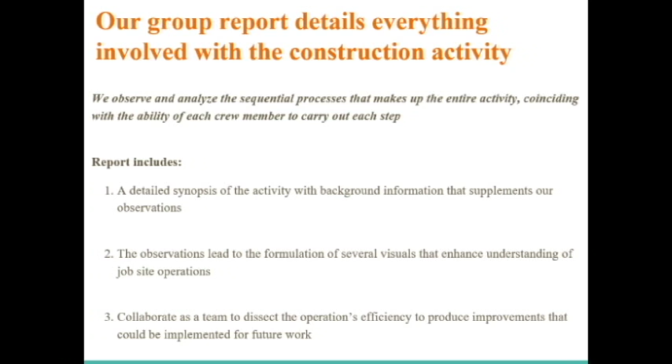This video is made for the term project of CEE 420 Construction Productivity from Team Bechtel. We observe a site from the video. This video was uploaded to YouTube on May 16, 2011, and it shows the brick laying process for 6 minutes. From the video, we can see it is a sunny and clear day, and the temperature is moderate, judging by the clothes of the workers.

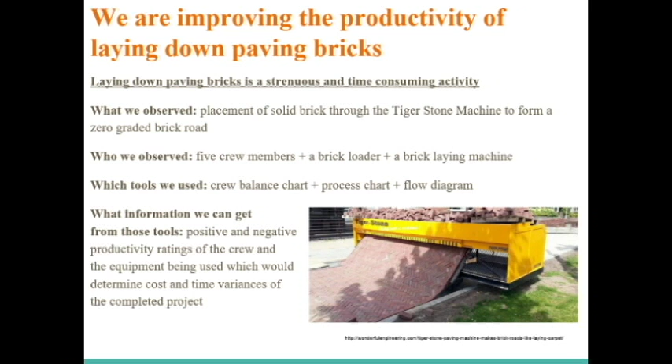Let's see the executive summary of our project first. Basically, we are improving the productivity of laying down paving bricks, and we observe the placement of solid bricks through the Tiger Stone machine to form a zero-graded brick road. There are 5 crew members, 1 brick loader, and 1 bricklaying machine on site. We are going to use the crew balance chart, process chart, and flow diagram to analyze the existing and proposed plans.

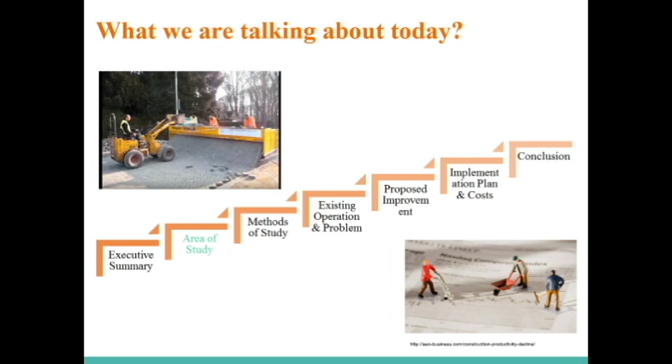Hello, this is Matt Brannick, and I'll be talking about the area of study. Basically, we saw that there are 5 workers in the video. 1 worker was cutting bricks, basically along the edges. There are 3 workers arranging bricks into the Tiger Stone paving machine, and 1 worker was simply operating a small loader, transporting the bricks from storage to the Tiger machine.

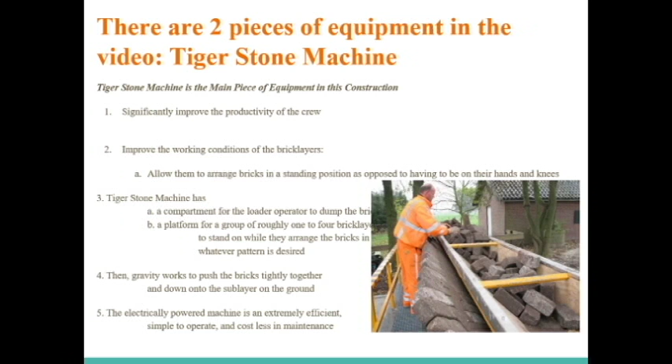Then there are basically 2 pieces of equipment in the video. As you saw, there was a Tiger Stone machine that ran off electricity. It helped them place the brick and increase their productivity, and definitely made it easier for the bricklayers to put down the bricks without having to bend over, get on their knees, and all that tough work. The other machine was the front end loader, which was designed to transport the bricks from the storage area to the Tiger Stone machine.

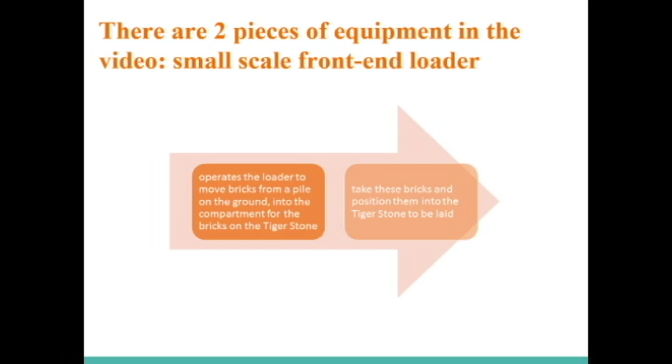And finally, the hardest, most labor-intensive portion is the guy who was falling behind with the cutter. He had to fill in the edges, and he was down on his hands and knees, had padding on his knees, and was required to use the most amount of skill in putting down and filling in the areas that were missed.

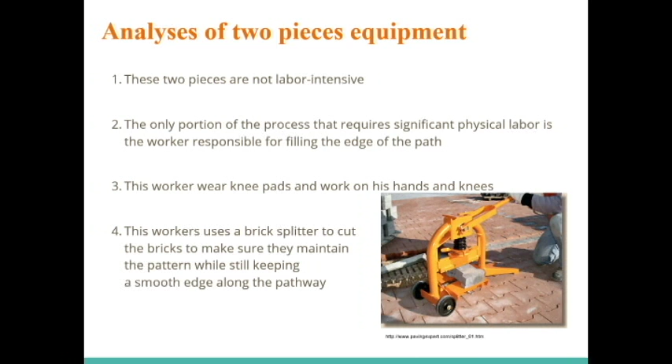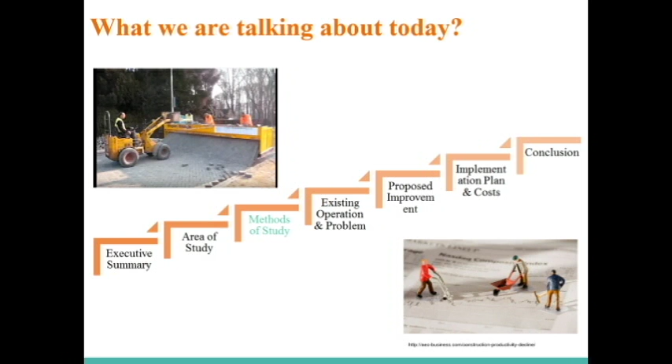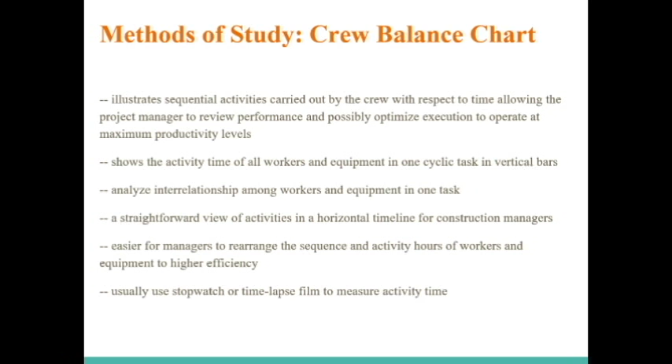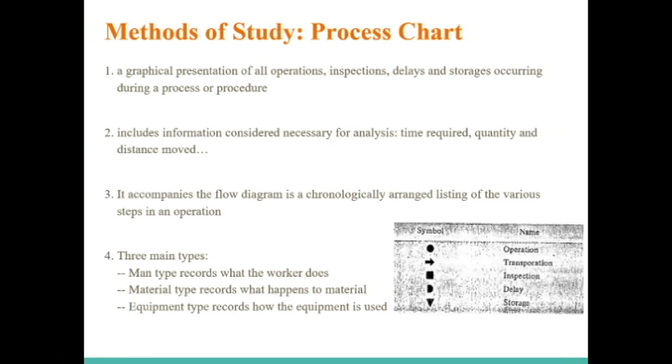The process chart is a graphical presentation of all operations, inspections, delays, and storage occurring during a process or procedure. Process chart has 3 main types. Man type records what the worker does. Material type records what happens to material. Equipment type records how the equipment is used.

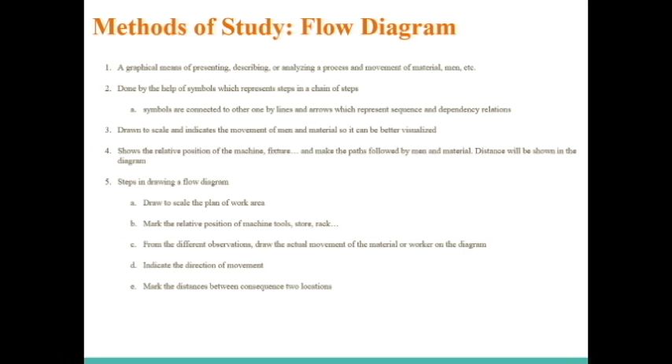Flow diagram is a graphical means of presenting, describing, or analyzing a process and movement of material or man. Flow diagram shows the relative position of the machine, fixture, and makes the path followed by man and material.

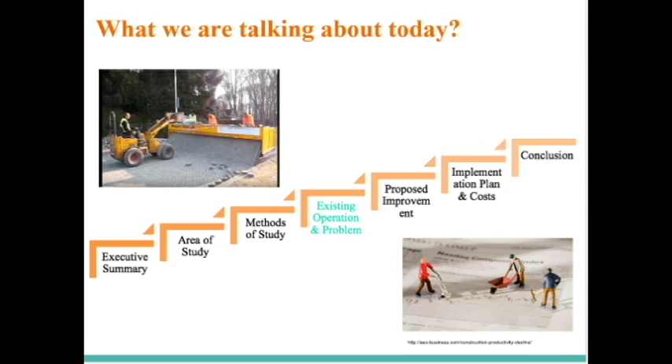We will now discuss the existing operation and the problems that go with it. As you can see, there are 5 workers performing this activity: a skid steer operator, a stone cutter, 2 bricklayers, and a Tiger Stone machine operator.

Overall, the productivity of this activity goes up when using the Tiger Stone machine compared to laying the bricks by hand. However, the stone cutter is the reason that productivity is not at its highest potential. The stone cutter can only cut and place 7 bricks per cycle on average, while the Tiger Stone machine creates 12 areas that need bricks to be manually cut. This is a huge problem that drops the productivity of this operation.

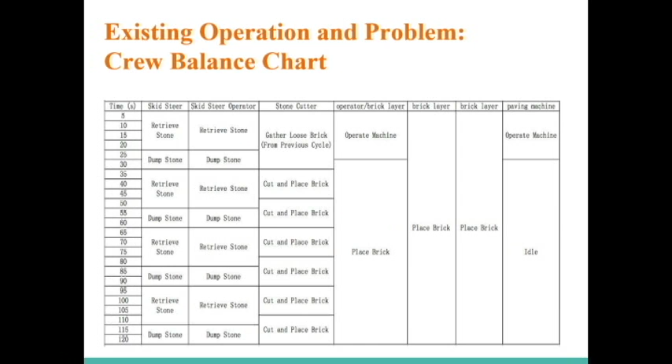Another problem is that the skid steer cannot evenly drop bricks throughout the whole machine, which causes workers to stand really close to each other to grab bricks. This unnecessary problem causes congestion on the machine and slows productivity.

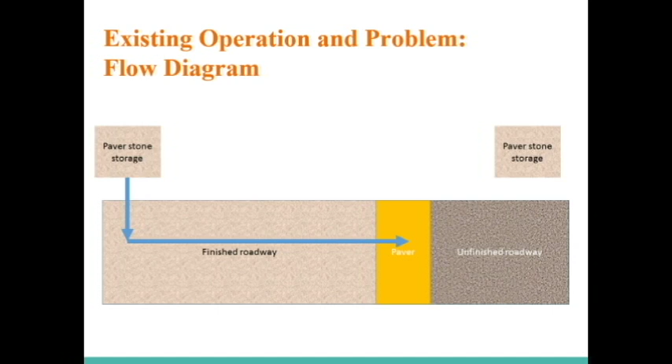The process chart and flow diagram shown are used to visualize the activity. When deciding which plan to implement, we used cost analysis to determine which plan would be most cost effective for improving the given activity. Using RS Means data, we estimated the direct cost of each activity, including labor, material, and equipment costs.

Some other assumptions that we included in this cost analysis are as follows. We assumed that the Tiger Stone bricklayer can lay a maximum of 3,229 square feet per day. This is directly from the website, which shows the Tiger Stone bricklayer.

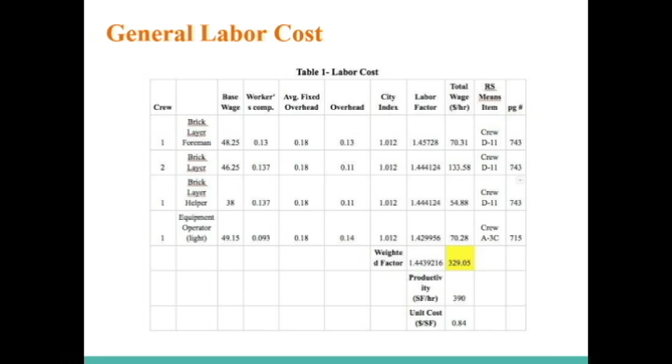All labor unit costs and factors were obtained from RS Means 2016. The skid steer loader is assumed to be a 78 horsepower diesel type machine. The operation and ownership cost of the Tiger Stone bricklayer was assumed to be about $25 per hour. The material cost of the bricks were assumed to be $3.96 per square foot.

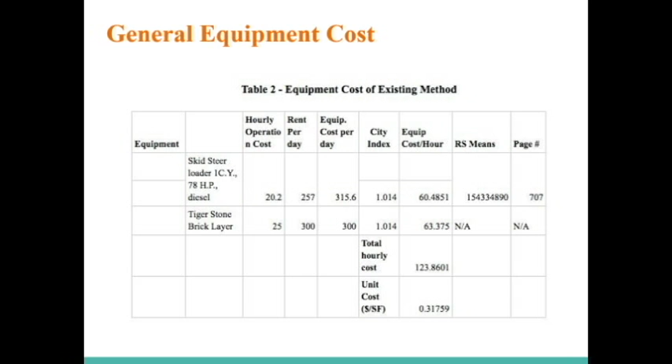When we analyzed the implementation plan of using pre-cut bricks, we assumed that there would be a 5% increase to material costs if we requested this from the manufacturer. While not all the improvements had a significant change in the unit cost per square foot of work done, they did in effect shuffle the costs from different categories, which can have benefits in and of itself.

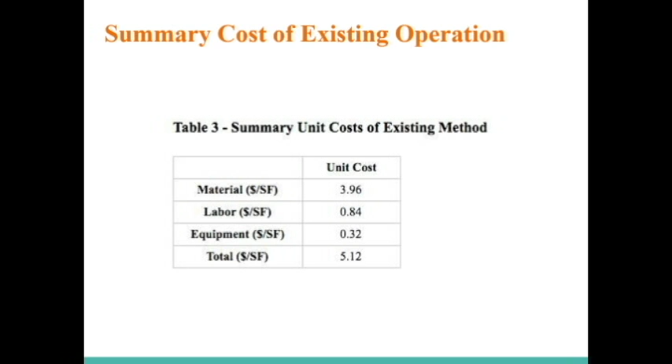After observing the video of our construction activity and identifying some of the issues with the process, we began to come up with a few solutions to remedy these issues. As mentioned before in the existing operations and problems section, one of the issues we observed was that the stone cutter was struggling to keep pace with the machine. As a result, our first proposed improvement is to add an additional stone cutter to the crew.

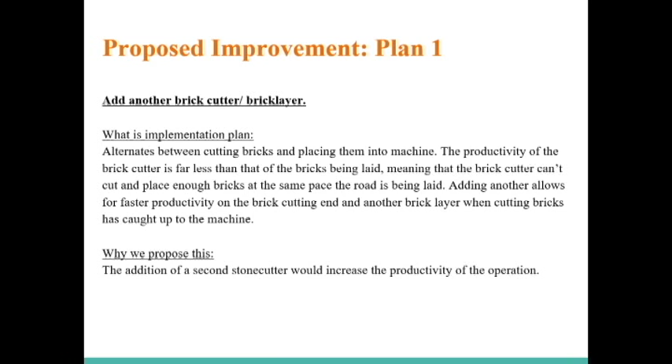In order to complete the pattern, each triangular area needs 3 bricks cut and placed on each side. Each cycle needs 6 bricks on each side of the pathway, for a total of 12 bricks that need to be cut and placed per cycle. However, we observed in the video that a single stone cutter can cut and place 7 bricks per cycle, which is 5 bricks below the pace needed to keep up with the Tiger Stone.

The addition of the second stone cutter brings the productivity of cutting and placing bricks more into accordance with that of the Tiger Stone. Additionally, in the event the stone cutters catch up and are waiting on the Tiger Stone, the extra stone cutter can join the bricklayers on the Tiger Stone in helping to arrange the bricks.

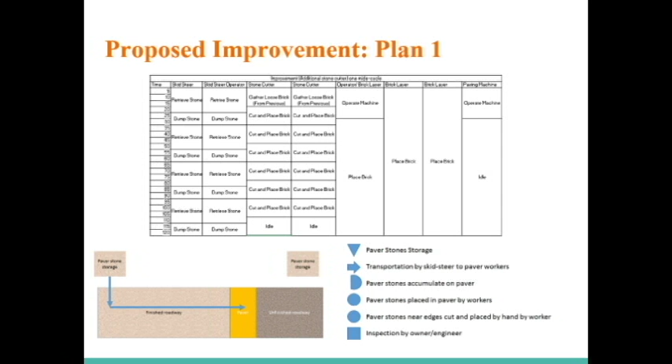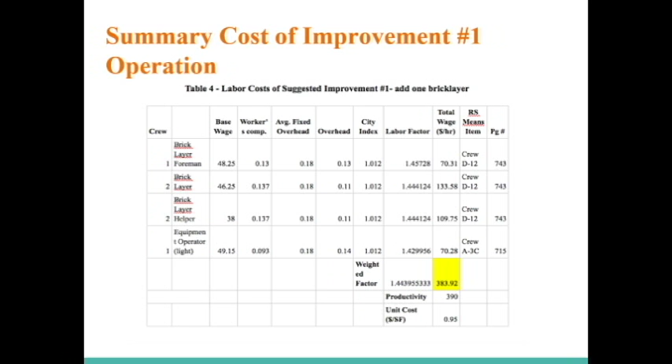Adding this extra stone cutter will increase the productivity of the crew, allowing each stone cutter to remain on one side of the roadway. This reduces the time the original stone cutter may have spent walking from one side of the pathway to the other. Additionally, this also increases the safety of the operation, with there being no need for the stone cutters to walk back and forth across the pathway and into the loader's path.

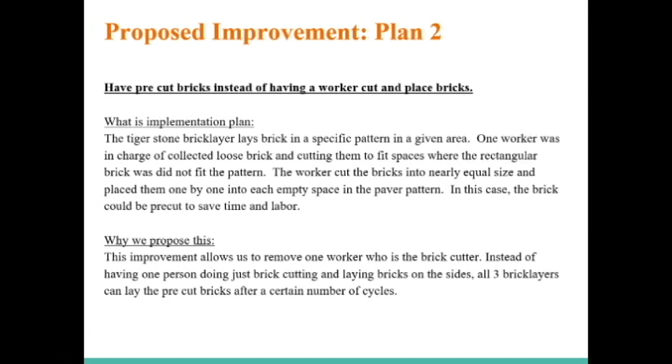Improvement number 1 details the addition of a stone cutter to the crew. This would be the second stone cutter in the crew. This addition would increase the productivity of the operation. Both stone cutters start off by gathering loose brick from the previous cycle, decreasing the amount of dropped bricks abandoned per cycle. 2 stone cutters would be strategically placed on each side of the Tiger Stone paving machine.

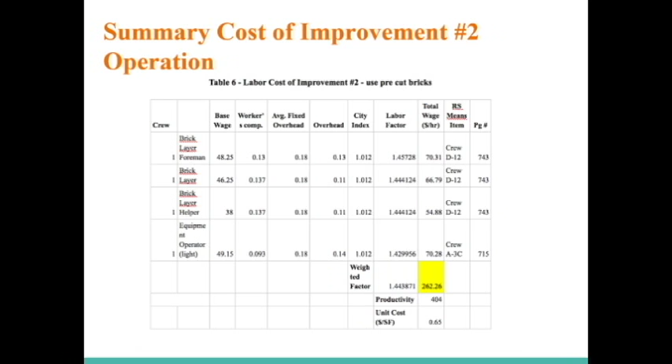In the original setup with 1 stone cutter, it was noticeable that their productivity was lagging behind the pace of the Tiger Stone machine. Adding a second stone cutter would assist in closing the productivity gap between cutting and placing brick and the machine churning out finished road.

Proposed improvement plan number 3. We added a flatbed truck instead of the skid loader.

The bricks will be neatly sorted on an operated flatbed truck that will follow the Tiger bricklaying machine at a level height for the 3 brick layers to pick up and place into the Tiger machine when needed. The flatbed truck would then push the brick piles horizontally towards the brick layers so they do not need to move from their stationary positions.

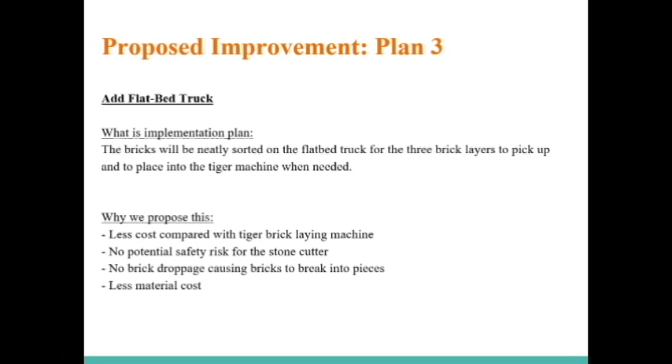The purpose of this is we have less cost compared to the skid loader, no potential safety risk for the stone cutter, no brick droppage causing bricks to break into pieces, and an overall lower material cost.

The crew balance chart shows the following, with the replacement of the skid loader and the skid loader operator. The flatbed truck will be supplying the bricks to the 3 brick layers at a constant rate through the 2-minute cycle. The flatbed truck operator will move the truck forward at each point the Tiger laying machine operates.

A stone cutter will be needed for the cut and brick placement for the side pieces of the road. The stone cutter will not be performing the task of gathering the stone from the previous cycle, because with the flatbed truck there will be no droppage of bricks.

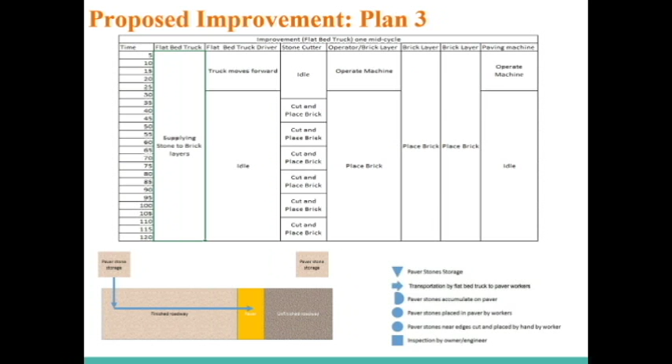The summary cost of adding a flatbed truck and removing the skid loader is shown on the chart below. We have 2 pieces of equipment: number 1 is a flatbed truck, and number 2 is a Tiger stone bricklaying machine.

We use the RS Means resource to find the hourly operation cost, rent per day, equipment cost per day, city index, and equipment cost per hour for the flatbed truck. We had to Google the equipment costs for the Tiger bricklaying machine, because RS Means did not have it listed. With all these calculations, we calculated the total hourly cost to be $124.37, and the unit cost per square foot to be 32 cents.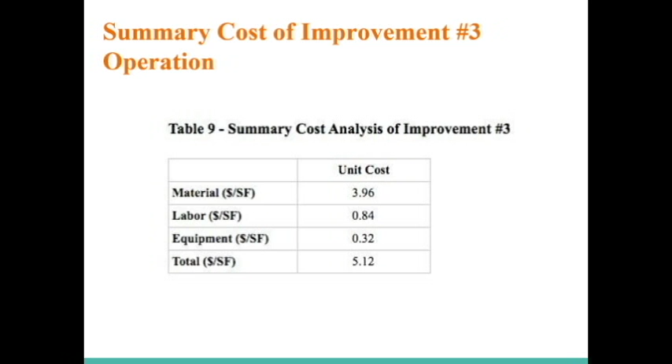The implementation of Improvement 2, ordering pre-cut bricks, will maximize efficiency while decreasing cost. Prefabrication in off-site facilities is a technique increasing in popularity, as they have known benefits including decreasing overall project costs, decreasing schedule times, improving overall construction quality, and allowing for more efficient use of both materials and labor.

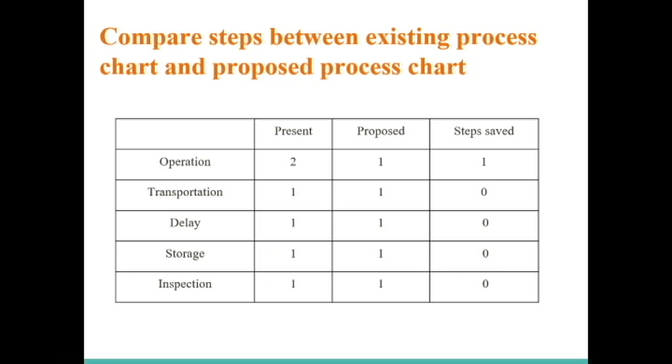Shop cut bricks will allow for precise cutting, will create elements that are easier to install, and will remove external elements hindering operations. Additionally, for our cycle, prefab will allow for removal of a worker.

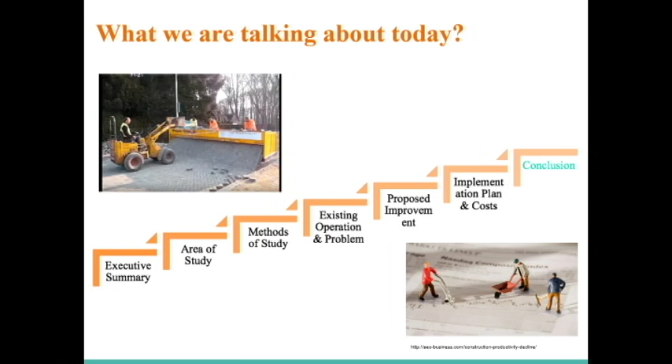To conclude, after analyzing the existing operation thoroughly through crew balance charts, process charts, flow diagrams, and cost analysis, we found that the existing operation was not as efficient as it could be, and therefore came up with various improvement strategies. One of the main problems with the existing operation was the slow pace of the stone cutter, who was struggling to keep up with the pace of the Tiger bricklaying machine.

To solve this issue, our second improvement plan details the utilization of pre-cut bricks, eliminating the need for this stone cutter and thus reducing crew size and labor cost. This strategy also improves efficiency by decreasing the cycle time as well as improving safety, and is therefore why we chose this improvement plan over the others.

Of course, with any operation, there are drawbacks, which in this case would be the increase in initial cost due to prefabrication of pre-cut bricks, as well as the need to separate the central bricks and edge bricks when laying. However, overall, the advantages far outweigh the disadvantages in this implementation plan, and therefore is the reason it was pushed forward.